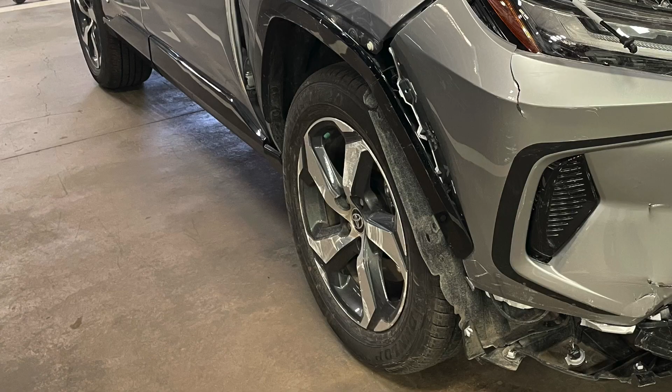Yeah, that's not the way it came off the floor. If we go to the next picture from the other side, there's lots of damage there. And if you zoom in, you can see the damage on the wheel. It needs a new door on that side. But you can see the way that nose is just swung way over.

Yeah, sure. And so, looking at this photo, even the casual observer walking by would know that this vehicle is going to be a total. Well, it appears to me, because both sides are severely damaged, my first impression is there must be some kind of frame damage. I think that's reasonable, my eye tells me that. And I would say you're a casual observer. I'm very, very casual, not a professional. Absolutely not, but my eye would tell me that, and of course it should be reinforced with a measurement.

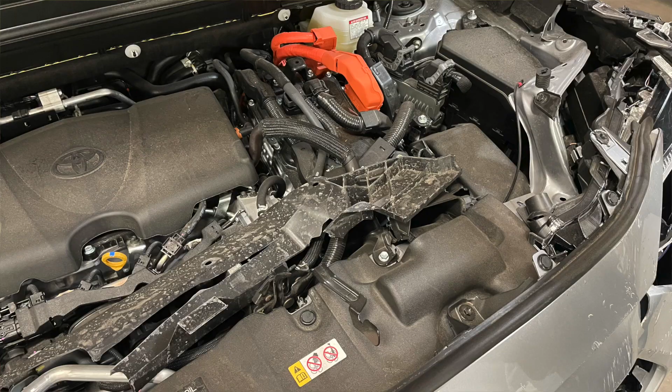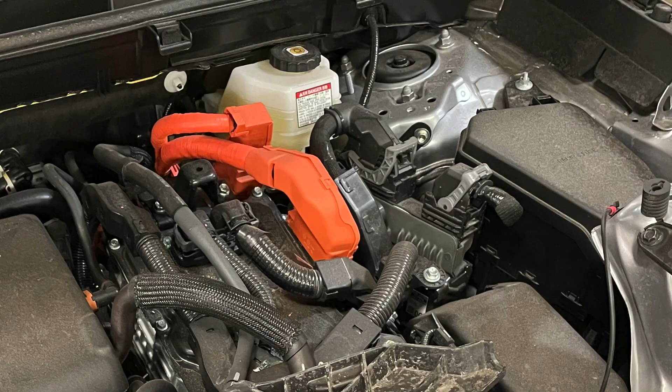Yeah, so let's take a look under the hood real quick. Oh, and there you can see your hybrid wiring. Yeah, they make it that way because it's dangerous. Don't ever touch those, that's the orange wires there. But over here, you can see the radiator support is just completely munched. Yeah, sure. That's one of the pieces that he has on the estimate, and we'll get to that in just a minute.

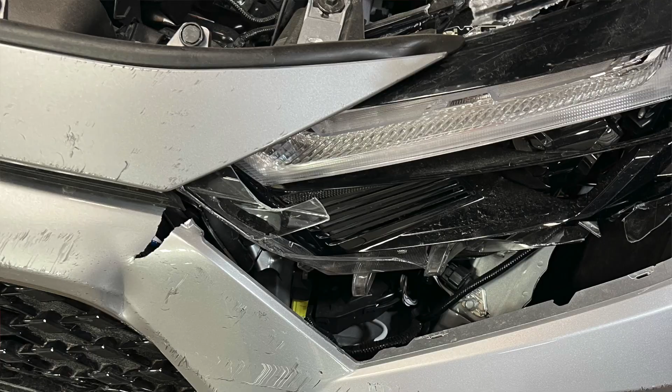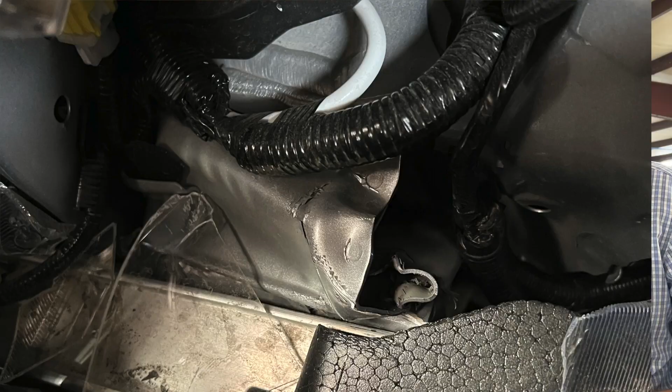Here it is. Here's a shot where you can see the headlight is smashed in and the bumper is kind of hanging out a little bit. And while the hood's open, it doesn't need to be open to be able to see in between the headlight and the bumper, there's a wide open gap. And if you look in between the bumper, you can look down inside and see the frame is almost folded over on itself. I see that right there, sure.

So these are some important things that need to be taken into consideration when you're writing an estimate, to repair a vehicle or to deem it a total loss. Maybe you don't even write an estimate on this car. Maybe you look at this damage that you can clearly see without disassembling it. That the car's probably a total loss, never going to come back.

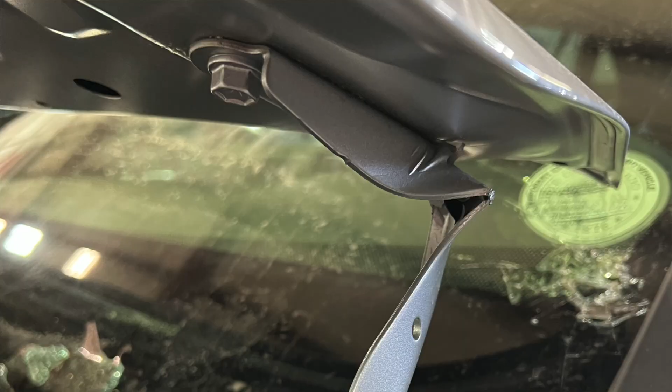This picture is one of the hinges of the hood. You can see that is mangled. Is that a good word? Yeah, that seems appropriate. So you have all this visible damage.

You need to review the estimates not only from the body shop but from the insurance company, so you understand how your vehicle is being repaired, especially in a case where it's a 2023, brand new. So let's take a look at the estimate real quick.

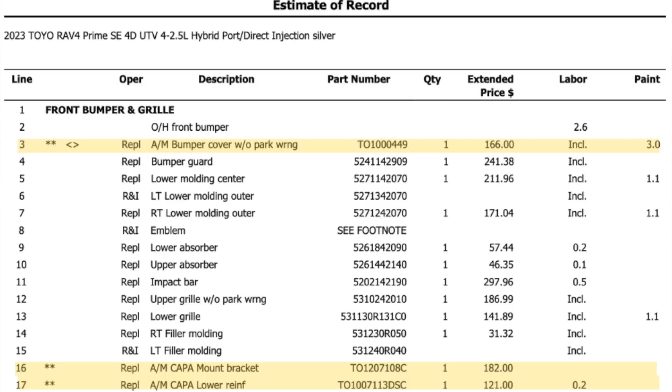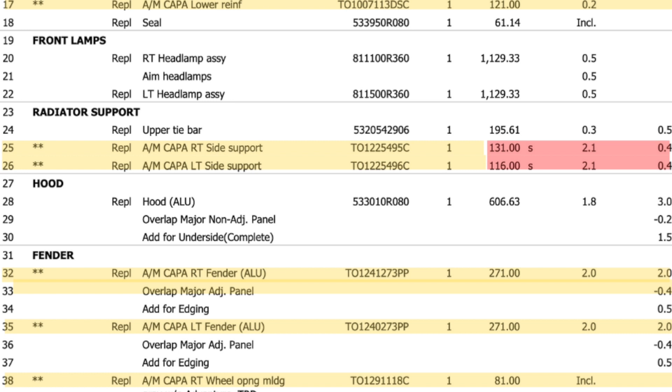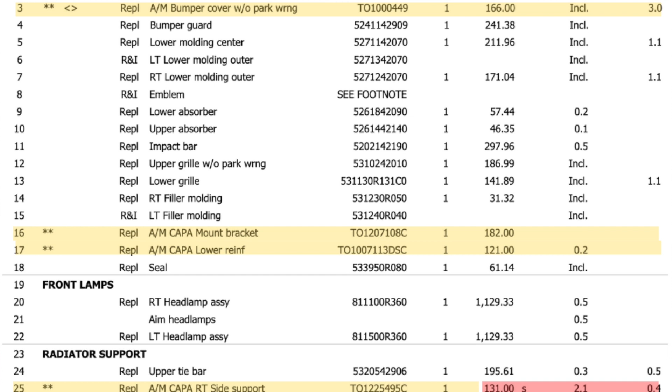Okay, now I put some highlights in here so you could see it a little clearer. It's glaring. Yeah. This vehicle has been written, okay, 2023 RAV4 hybrid with 2,000 miles on it. Has been written for all these aftermarket non-Toyota parts, all those are the ones that are highlighted in yellow. Some of them CAPA certified, some of them not, which is...

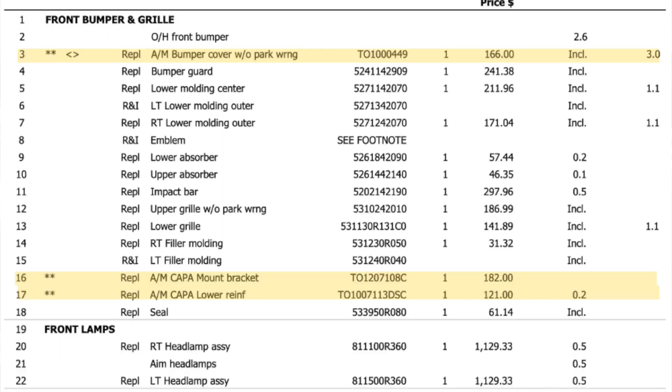Yeah, you want to learn more about CAPA, take a look at this video right up here, and you'll see what we have to say about them. So you can clearly see that all these color-coded parts are all aftermarket parts. They do not belong on a brand new car.

So let's get a little advice from Toyota. Okay, so here is a collision repair bulletin from Toyota, dated May 2022, so not that long ago. And it says Toyota and Lexus do not support the use of any alternative parts in collision repair procedures due to the sensitive nature of the safety or vehicle performance systems and their effect on vehicle crashworthiness.

You don't want these parts on your car. I don't care what year it is, unless it's old and they don't make the parts anymore, something along that line. These parts don't belong on new vehicles or even newer vehicles, 10 years newer. It doesn't really matter, we don't use them on any vehicle. But you do not want these on your vehicle. Toyota says, don't put them on your vehicle.

The other thing I want to point out here is line 17 is an aftermarket lower reinforcement. Reinforcement is a safety item, it protects you, it directs energy off the passenger, as do a lot of components in this thing. You don't want a non-known part going into this vehicle in that kind of a safety thing.

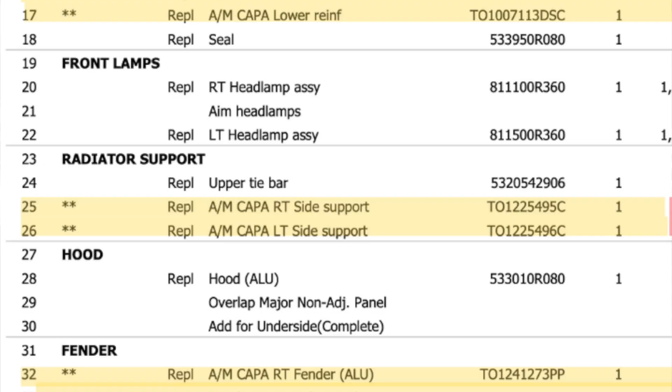Speaking of safety, we're going to jump down to line 25 and 26, and these are the side supports that I showed you in that first picture. Actually, let's just go back.

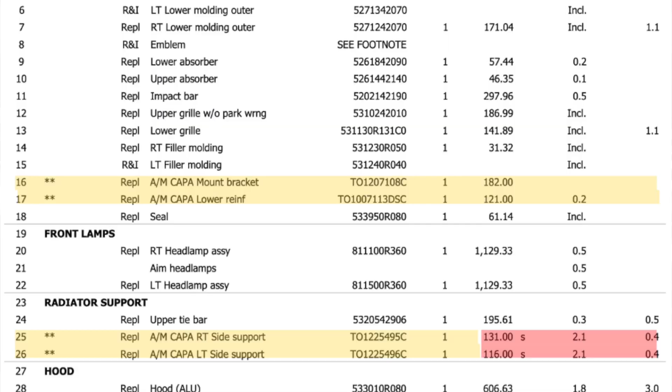If you notice all the way over next to the part price, they have a little S next to them, marked in red there for you. As you're looking through this estimate and you see the aftermarket parts, they're easy to identify because they say AM.

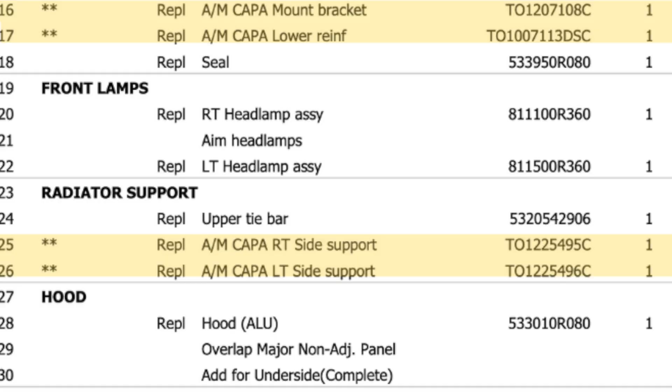They usually don't have the same type of part number that factory part numbers have. But this little S is really important, and they're next to aftermarket parts. The little S means structural, so it's a structural part. That means it's responsible for the distribution of energy and keeping the car together.

It's an important piece, and they're suggesting that aftermarket parts be used in that scenario. That's a huge no-no. I think that's why we named the video what we did.

The other thing I want to bring to your attention on this particular estimate is it was written by a person with a license number. A licensed appraiser. And then that begs a question: are there such things as unlicensed appraisers? I should get my own license, but I don't have one.

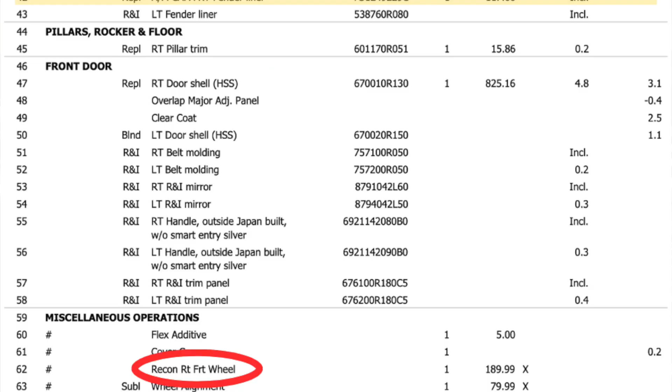But in any case, a licensed appraiser is looking at this car and has all these aftermarket parts. And then, by the way, all that damage, he seemed to find a way to capture in 66 lines and a little more than a page and a half of cataloging damage. So if we go to the second page, on line 62, it's got a reconditioned wheel. I'm sure you won't be surprised to realize that Toyota Lexus does not sanction the use of reconditioned wheels either, for safety reasons.

So you've heard me talk in other videos about reading the estimate and understanding what they're doing, and the other side of that is what isn't on the estimate. If we look at this vehicle, there's no setup and measure the frame on this vehicle. Even I would know that if you're going to write the estimate and not total it outright, you have to prove the fact that the frame is either good or bad.